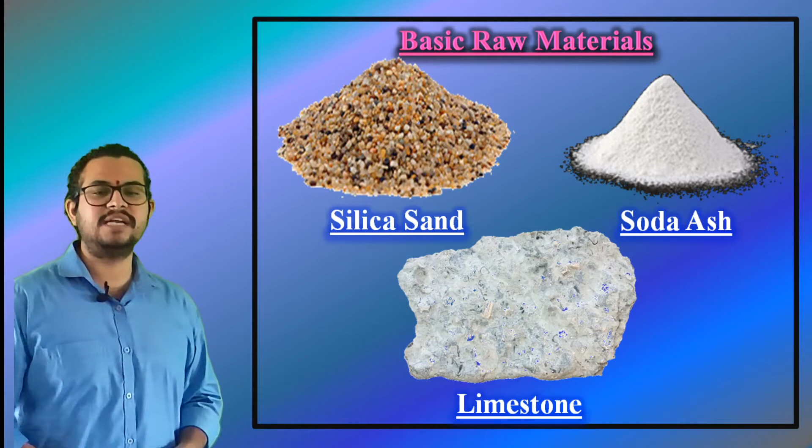Basic composition of fiberglass. The basic raw materials used in manufacturing of fiberglass include silica sand, soda ash, and limestone. There are even other ingredients that include borax, calcined alumina, magnesite, kaolin clay, feldspar, etc. Silica sand is the glass former and soda ash and limestone lower the melting point. The other ingredients contribute to the improvement of different properties. For example, borax improves the chemical resistance and so on.

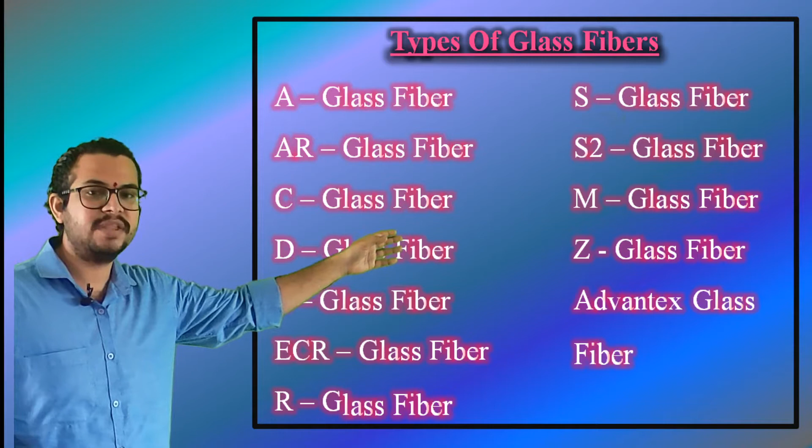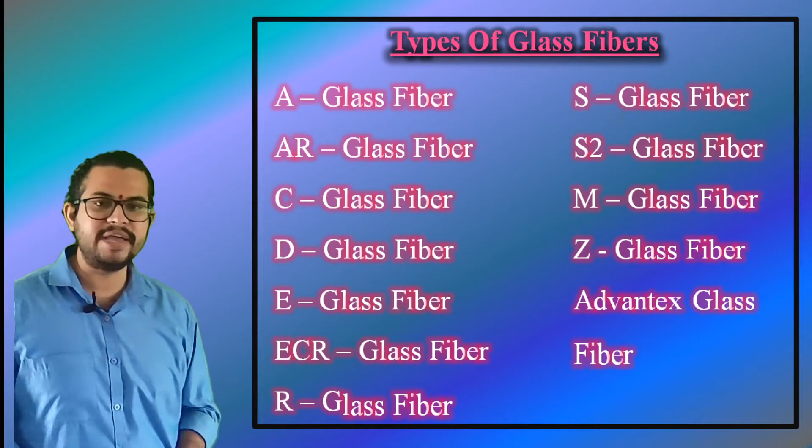We shall dig deep into each and every type. Okay, first we shall begin our journey with A glass fiber. A glass is also known as alkali glass or soda lime glass because it is made with soda lime silicate.

It is the most commonly available type of fiberglass, as about 90% of the glass that is manufactured is alkali glass. It is the most prevalent type used in making glass containers like jars and bottles, which are used for food and beverages, and also for window panes. Sometimes the bakeware that you use is also made from tempered soda lime glass.

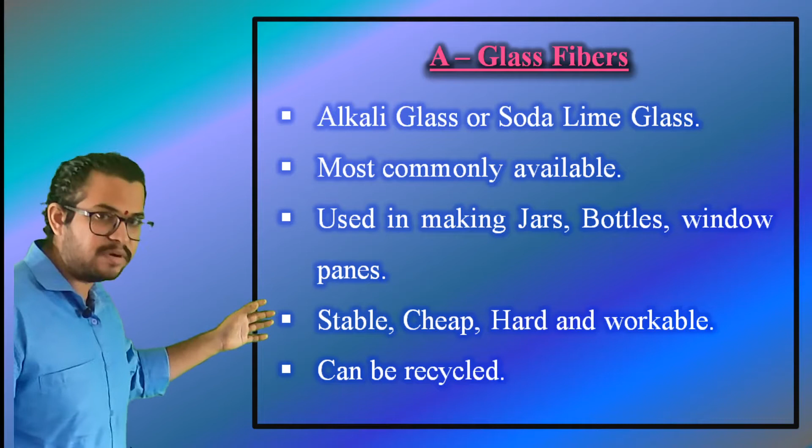In the Federal Republic of Germany, it is mainly used in the manufacturing process of process equipments. Soda lime glass is chemically stable, relatively inexpensive, extremely workable, and quite hard. It can be remelted and resoftened numerous times, which is why A-glass type glass fiber is the ideal type of glass for glass recycling.

Moving on to the next slide, we have types of soda lime glass. Soda lime glass is technically divided into two types, which are flat glass and container glass. Flat glass is the glass used to make windows, and container glass is used to make containers. So very simple, right? Flat glass and container glass not only differ in application, but also in the method of manufacturing and the chemical composition.

Flat glass is prepared using the float process, while container glass is manufactured by blowing and pressing. As for the difference in chemical composition, flat glass has a higher quantity of magnesium oxide and sodium oxide and a lower quantity of silica, aluminium oxide and calcium oxide as compared to container glass. The container glass has a low content of highly water-soluble ions like magnesium and sodium, which makes it more chemically durable. Therefore, it is much more used for storage of food and beverages.

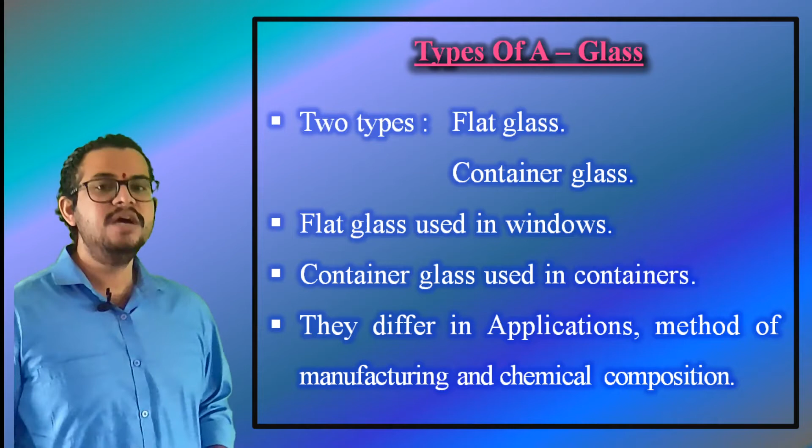Next, we will move on to the list of raw materials required for manufacturing a fiberglass. Raw materials used for making A-glass fiber: the core materials include soda, also called sodium carbonate. Next we have lime, silica, also called silicon dioxide. Next, dolomite, alumina or aluminum oxide, and fining agents like sodium chloride and sodium sulfate.

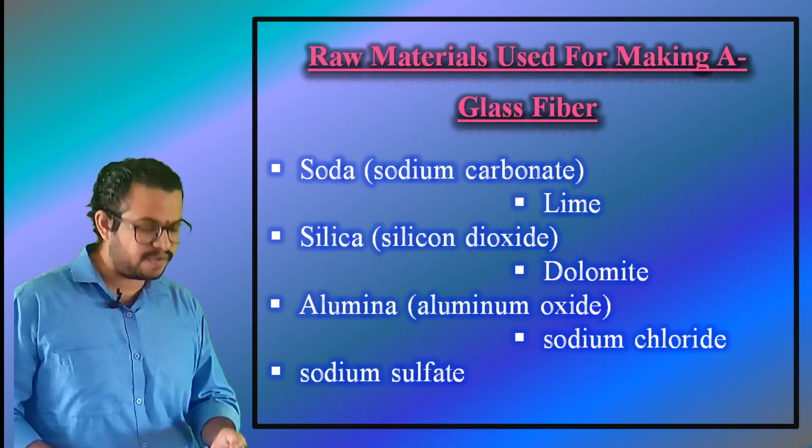Manufacturing of soda lime glass. All the raw materials are melted in a glass furnace at a temperature of 1675 degrees Celsius. Inexpensive chemicals like sand and trona are used instead of pure chemicals. Trona is a grayish, white or yellowish hydrated sodium carbonate mineral, and feldspar is also used. This mix of raw materials in the glass fiber is called a batch.

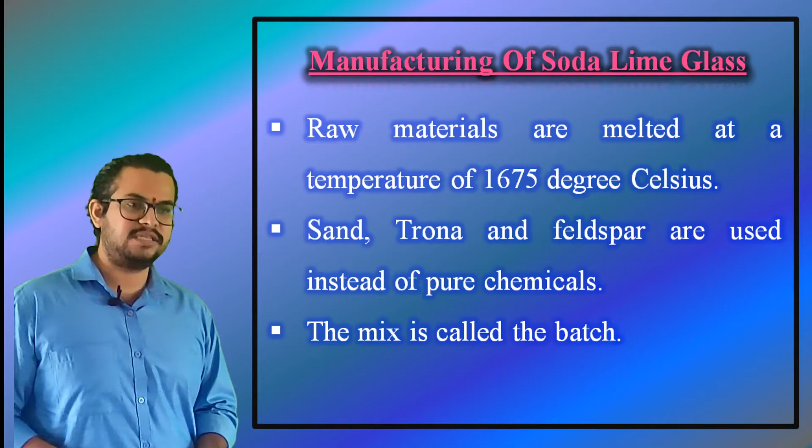Moving on, we have AR glass, which is also called alkali resistant glass. It has been developed specifically to be used in concrete, and its composition has been formulated specifically with zirconium at an optimum level. This addition of zirconium is what makes this type of fiberglass suitable to be used in concrete.

The incorporation of AR glass in concrete mixes with steel mixtures is quite easy. Moreover, unlike steel, it does not rust. It is difficult to dissolve AR glass in water, and it is not affected by changes in pH.

You know what pH is, right? pH, or potential of hydrogen, is a measure of acidity or alkalinity in which the pH of pure water is 7, with lower numbers indicating acidity and higher numbers indicating alkalinity. It has a high modulus and tensile strength.

It prevents the cracking of concrete by providing strength and flexibility. Therefore, AR glass fiber is used in premix GFRC. What is GFRC? Glass fiber reinforced concrete, and other concrete and mortar reinforcement applications.

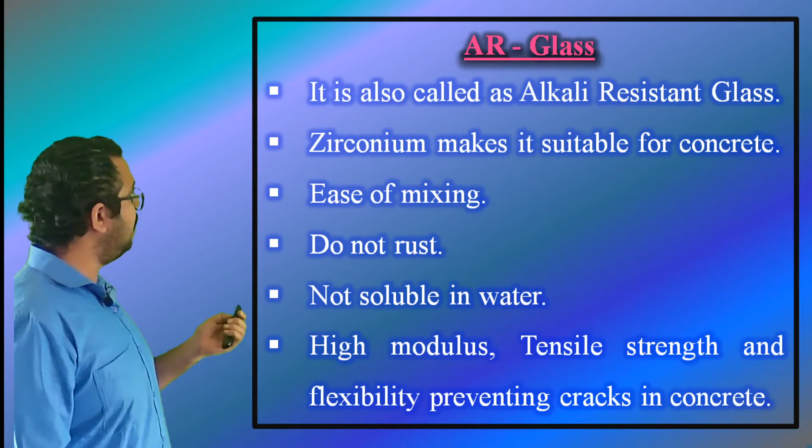Next on our list is C-glass. What is C-glass? C-glass or chemical glass is the corrosive resistant glass which is made with calcium borosilicate, and it shows the highest resistance to chemical impact.

The pH value of the chemicals used in the manufacturing of C-glass type fiber provides fairly high resistance to this type of fiberglass, regardless of the environment, whether it is acidic or alkaline. It provides structural equilibrium in corrosive environments, and therefore C-glass is used in the outer layer of laminates in the form of surface tissues, for pipes and tanks, and it holds water and chemicals.

Moving ahead, we have D-glass. D-glass is a type of fiberglass known for its low dielectric constant, which is due to the presence of boron trioxide in its composition. D-glass also contains borosilicate, which gives this type of fiberglass an extremely low coefficient of thermal expansion, as you can see here.

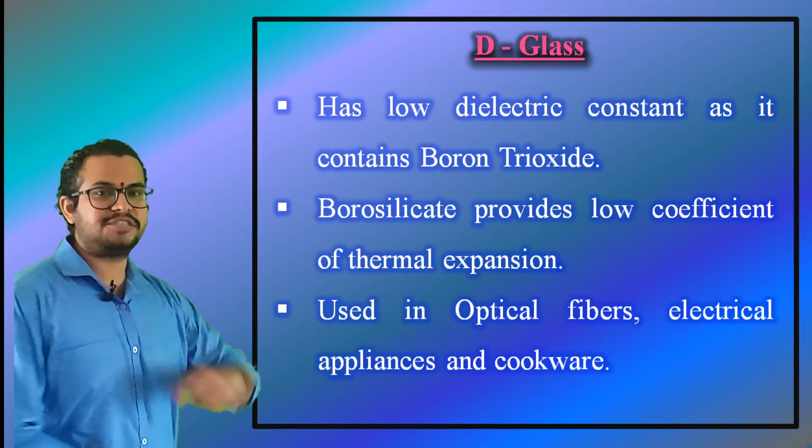Due to these characteristics and properties, D-glass is the ideal type of fiberglass to be used in optical fibers, electrical appliances, and cookware. Next we have E-glass. E-glass is more commonly known as electrical glass. It is the most commonly used fiber in the fiber reinforced polymer composite industries. E-glass is an alkali-free, highly electrically resistive glass which is made with alumina and calcium borosilicate, and is known in the industry as a general purpose fiber for its strength and electrical resistance.

This kind of glass combines the characteristics of C-glass with very good insulation to electricity. It is a lightweight composite material that is used in aerospace, marine, and industrial applications.

E-glass fiber, E-glass fiberglass cloth - it's a combination of different words. It is an industry standard that provides a balance between performance and cost. Moreover, it has excellent draping characteristics, making it cleaner to work with. Draping is like a curtain-like thing, just to cover.

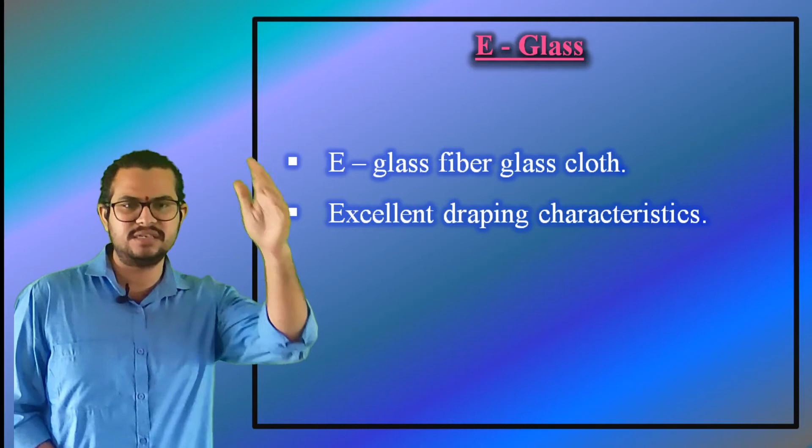Moving on to the raw materials used to make E-glass fiber: silica, which is nothing but silicon dioxide, alumina or aluminium oxide, calcium oxide, magnesium oxide, boron trioxide, sodium oxide, and potassium oxide.

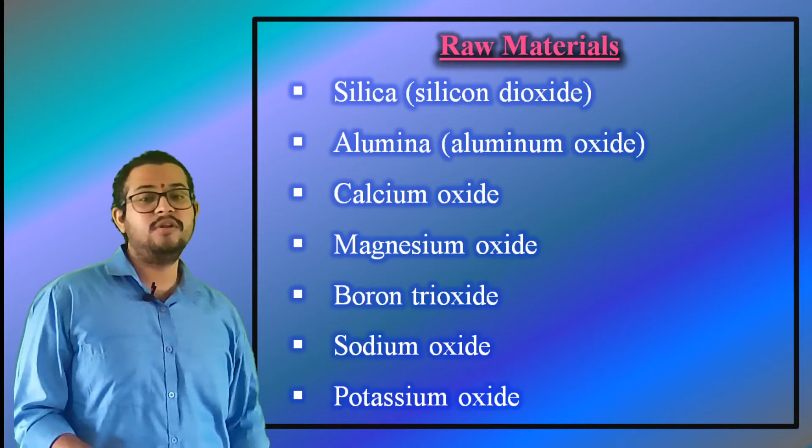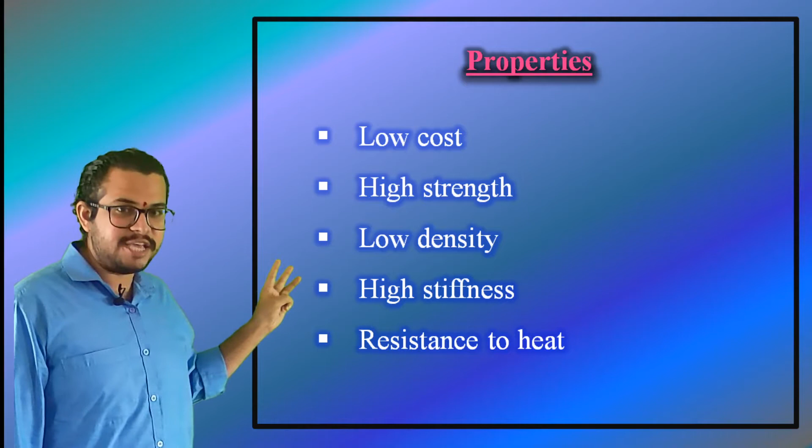Apart from this, we will also see the properties of E-glass fiber. The key properties that make E-glass a popular type of fiberglass are low cost, high strength, low density, high stiffness, and resistance to heat. Apart from this, we also have multiple other properties, starting with non-flammable, good resistance to chemicals, relatively insensitive to moisture, good electrical insulation, and ability to maintain strength in different conditions.

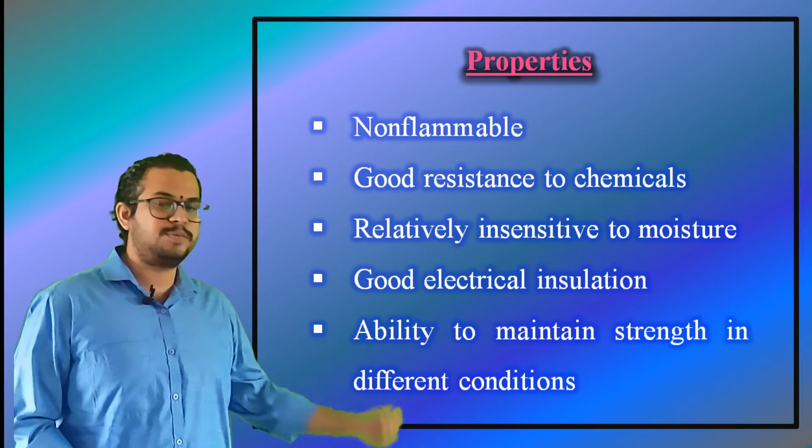Now since we are done with these properties, let's move on to the applications of E-glass fiber. E-glass was developed to be used in electrical applications, but it is used in numerous other areas as well. It has led to the production of glass reinforced plastic combined with thermosetting resins. Sheets and panels made from glass reinforced plastics are used quite extensively in nearly all industrial areas. It protects the structural integrity against any mechanical impact.

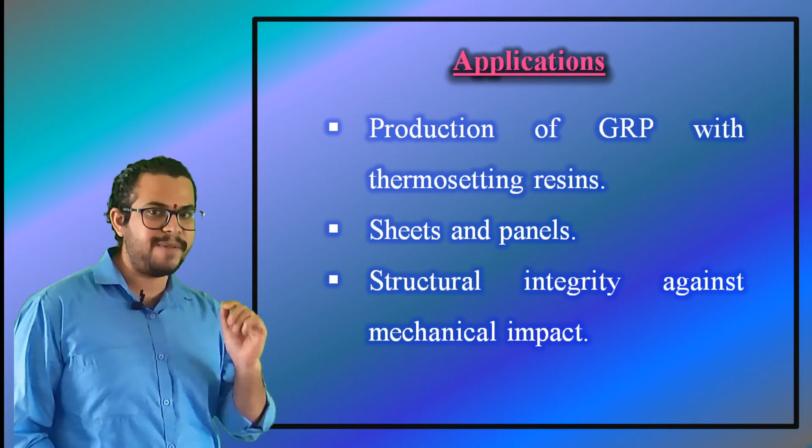Next in the list we have ECR glass fiber.

ECR glass fiber is also called electronic glass fiber. It is made of calcium aluminosilicates that provide its strength, acid corrosion resistance, and electrical conductivity, making it suitable for applications where these properties are needed. It comes with properties such as high mechanical strength, higher heat resistance, better mechanical properties, lower electrical leakage, better waterproofing, and higher surface resistance as compared to e-glass. Moreover, it offers higher performance at a lower cost.

Moving on to the next slide. The biggest advantage that ECR glass has over the other types of fiberglass is its method of manufacturing, which is very environmental friendly with longer service lives. It is a more durable type of fiberglass due to its superior resistance to water, acid, and alkali. ECR glass fiber is used in the making of transparent GRP panels, glass reinforced polymer panels.

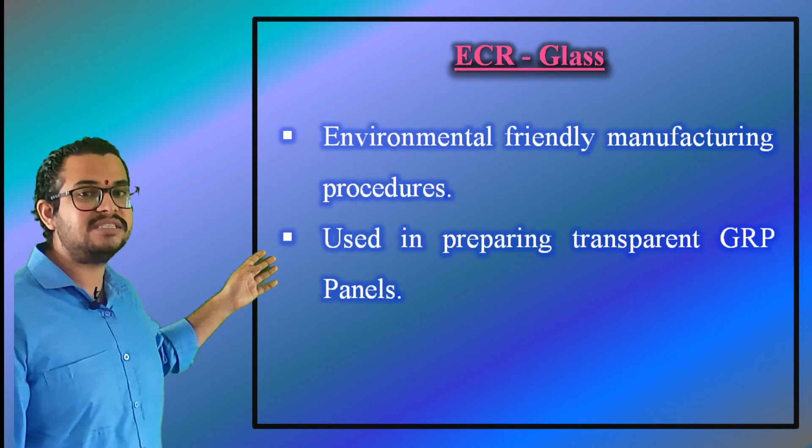Next we have R glass, S glass, and T glass. All three are the trade names for the same type of fiberglass, where R glass is the reinforcement glass which is made with calcium aluminosilicates, where higher strength and acid corrosion resistance is needed.

S glass is the high strength glass made with magnesium aluminosilicates, and it is used where high strength, high stiffness, extreme temperature resistance, and corrosive resistance is needed. They have greater tensile strength and modulus as compared to E-glass fiberglass, and the wetting properties and acidic strength of this particular type of fiberglass is also higher.

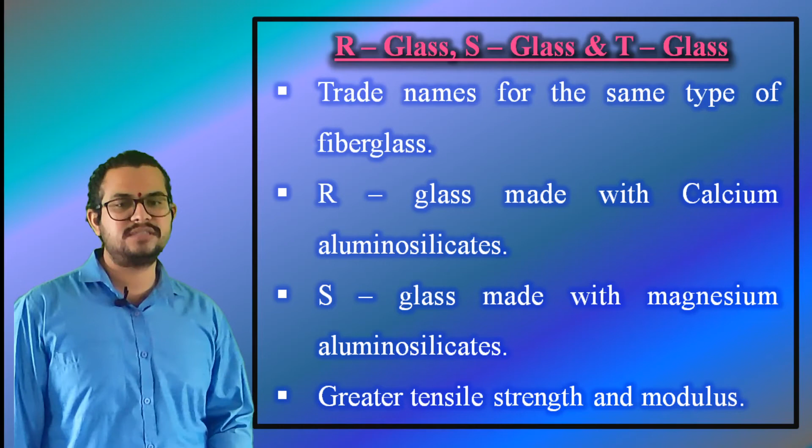Moving on to the next slide. All these properties are obtained by reducing the filament diameter. This type of glass fiber is developed for defense and aerospace industries, and in applications of rigid ballistic armor. Due to high performance, these are used only in specific industries, so the production volume is very low, which leads to increased costs.

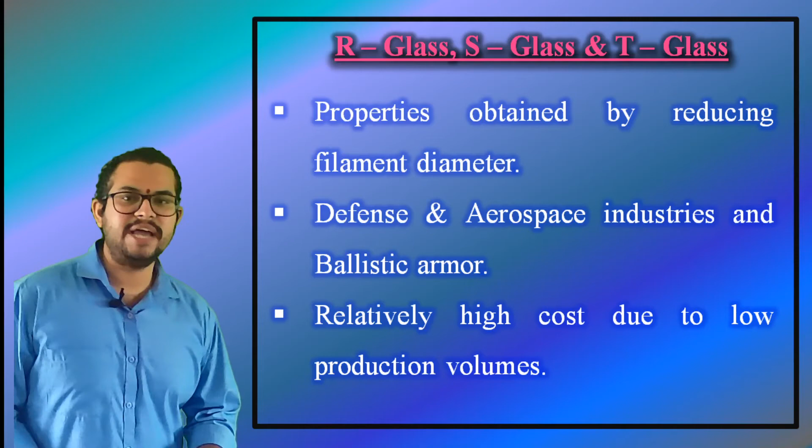Moving on to the next slide. S2 glass. It is a glass similar to but with somewhat improved properties over S glass. S2 is a brand name which was originally created by Owens Corning, but it spun off in 1998, and is now a registered trademark of AGY Holdings Corporation.

S2 glass fiber is the highest performing type of glass fiber available today in the market. S2 glass has a higher level of silica in its composition compared to other types of fiberglass. As a result, it has enhanced properties, better weight performance, high temperature resistance, high compressive strength, and improved impact resistance. Above all, S2 glass also offers better cost performance.

The tensile strength of S2 glass is approximately 85% more than conventional fiberglass. It gives consistent high performance and durability. It has better fiber toughness and modulus of resilience that provides improved impact capabilities to the finished parts, along with a higher damage tolerance and composite durability.

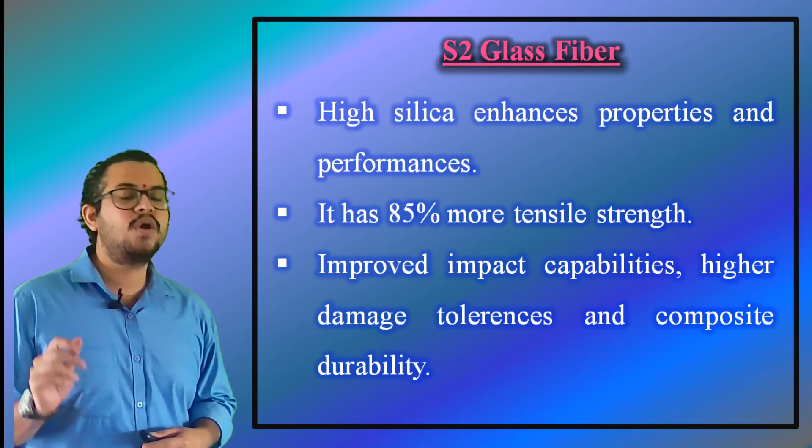Moving on to the next topic. It also offers about 25% more linear elastic stiffness and shows excellent tolerance to damage. S2 glass fiber is mostly used in the composite and textile industry due to physical properties that are better than conventional types of fiberglass.

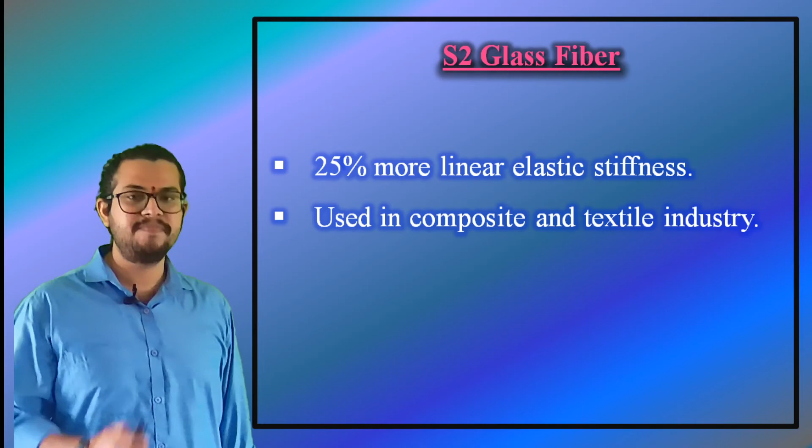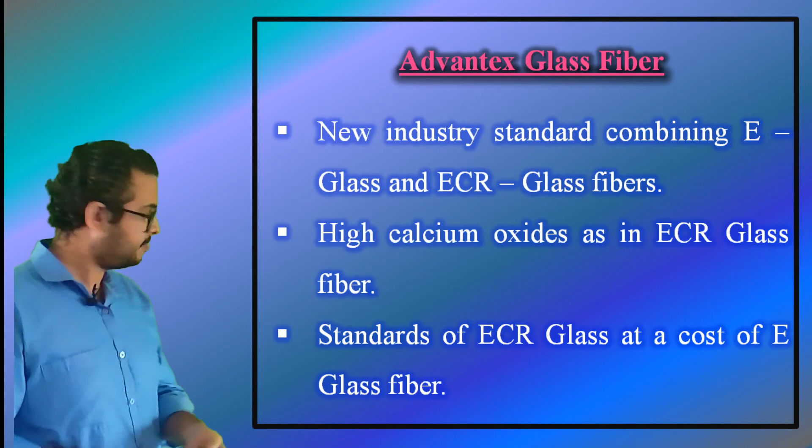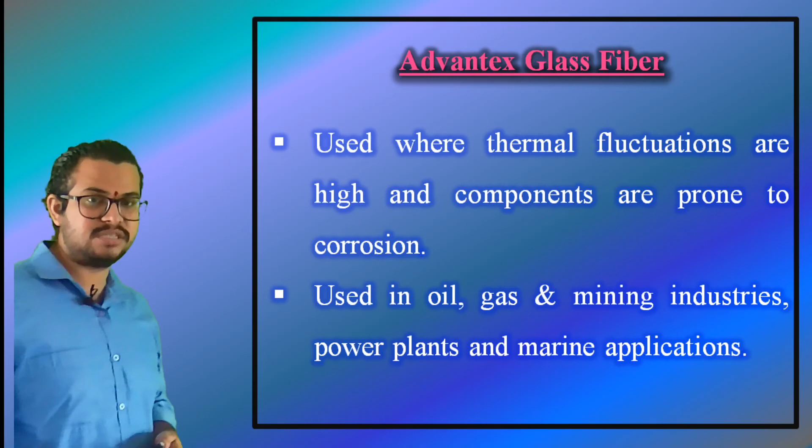The Advantex fiberglass can be used in applications where thermal fluctuation is greater due to its higher melting point, and also where structures are more prone to corrosion. Moreover, this type of fiberglass is commonly used in the oil, gas and mining industries, power plants and marine applications like sewage systems and wastewater systems.

Next in the list is M glass fiber. M glass fiber has beryllium in its composition, and this element adds additional elasticity to the fiberglass.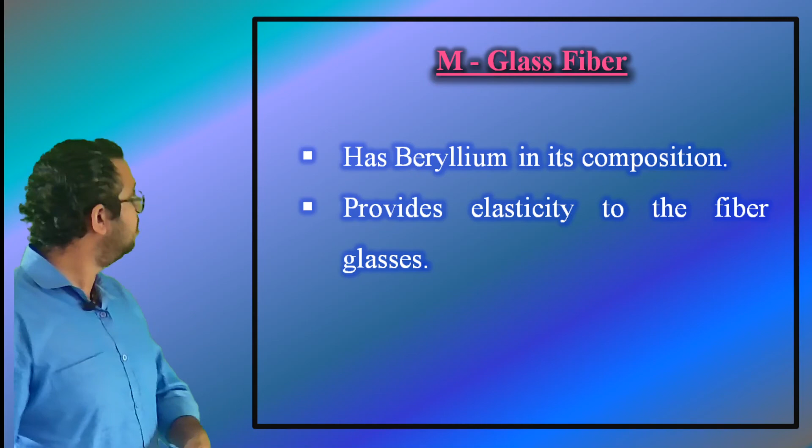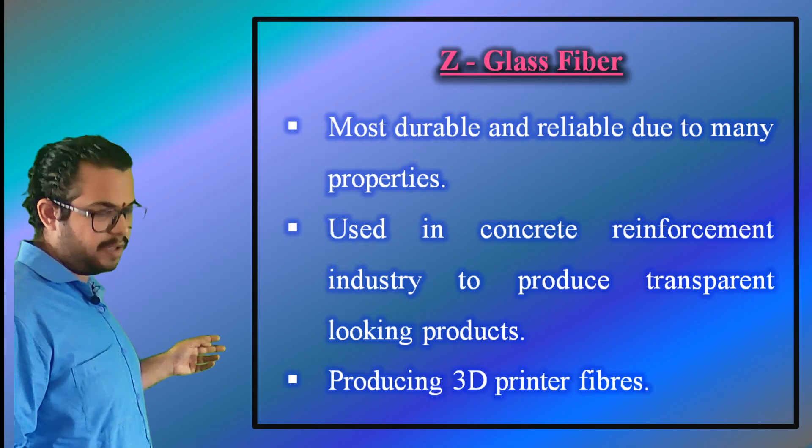So we will end our lecture today, and when we meet in the next session, we will look into some other forms of fibers in which they exist, along with properties, applications and manufacturing techniques of all those things. So that's all for today, thank you.